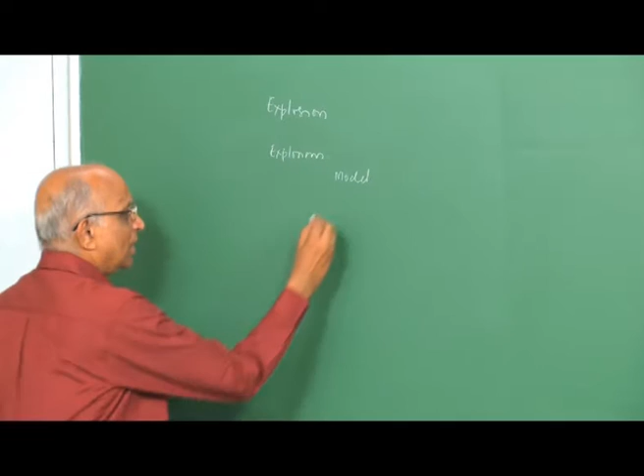We looked at the modeling of the explosion and also determined the consequences, the damage, the type of blast wave, the type of overpressure, the type of impulse you get from an explosion. And by now we are very clear about explosions in general, and also we talked of inerting, vents and all that to bring down the destructive nature of explosions.

Having said that, we also in the last lecture looked at quantification of damages from explosion. We looked at the dose response curves, we looked at the probit, and now we are in a position to say, well, an explosion is something undesirable, and an explosive is also something undesirable.

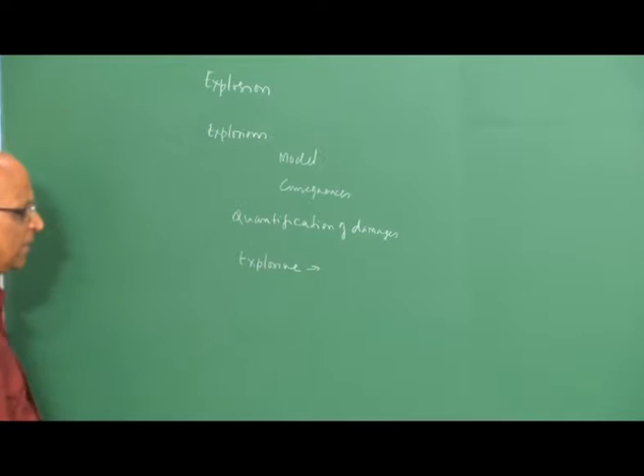It could be a gas, it could be a liquid, it could be a mixture, it could be anything. It must be handled with care. That means the storage of the explosive, maybe the transport of the explosive, also maybe the generation of the explosive plus storage plus transport plus the actual use, that is in application, must be done with some safety precautions in mind.

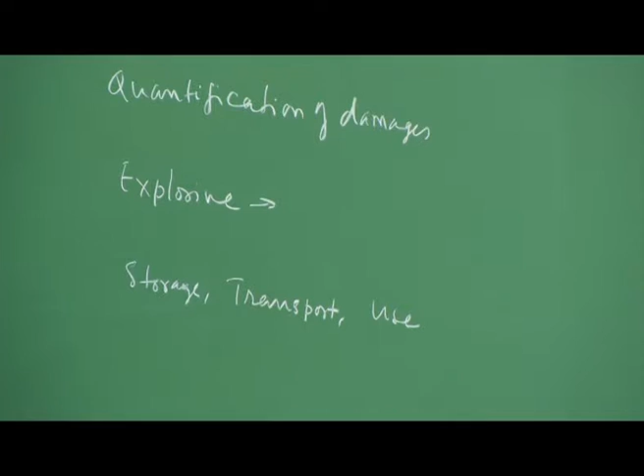But whatever be the type of safety criterion we use, accidents do happen. Like for instance, I am very careful to cross the road, I am very fearful of the traffic, I take all precautions, still somebody can come and hit me and I could still get hurt. Therefore, accidents are something which are unplanned activity.

Being unplanned, I think it is necessary to see under what conditions accidents can take place and also ensure that these accidents in the use of explosives do not generally occur. Therefore, let us get into some little more details of accidents.

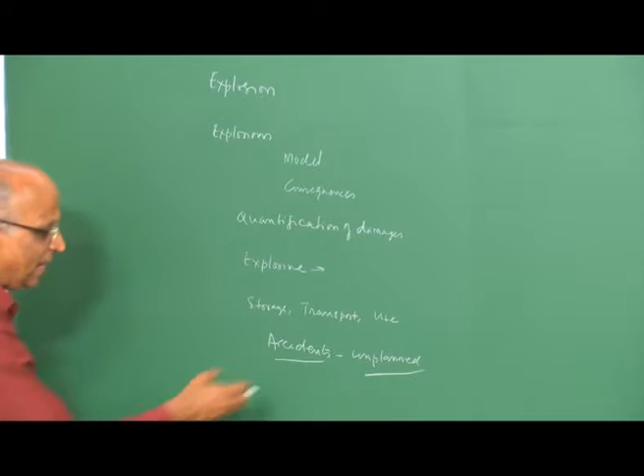When we say an unplanned activity is an accident, there is always a risk involved in whatever we do, and there is a greater risk in the use of explosives. Therefore, if there is a risk, can you evaluate or identify it? Like for instance, identify the probability with which an explosion can take place in a given set of conditions.

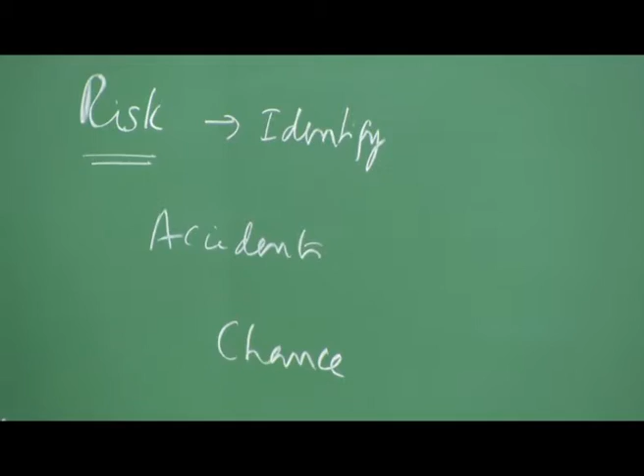And if we are very clear about it, then maybe we can take some steps to counteract the occurrence of these explosions. Having said risk, and having said something about accidents, there is always a chance that an accident will occur. When I say chance, what is it I mean? Well, there is a possibility, and when we say chance in Arabic, the word chance is known as azhar, and therefore we say a substance is hazardous.

From the word hazar, you say hazardous, and when we say hazardous substances, we say, well, explosives are hazardous substances and have to be handled with care. When we say hazard, we mean the potential for an accident to take place.

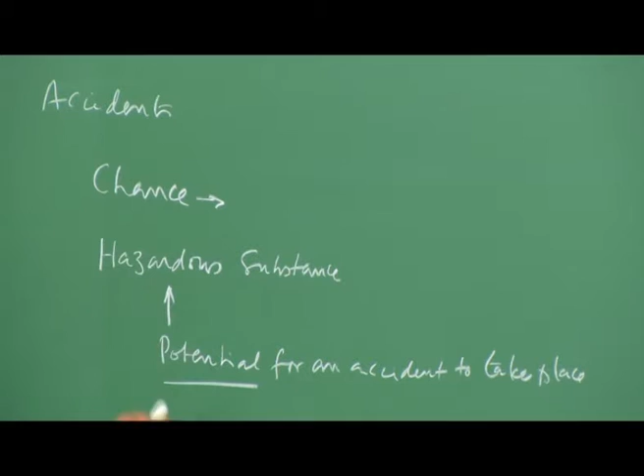That means we need to reduce the potential, and that is why substances like liquid fuels, when they are being transported, are labeled hazardous substance, please be careful, because in case there is a spill, maybe you could form an explosive substance. Therefore, we talk in terms of hazardous substances, and the potential for an accident to take place is always there, and that is the meaning of the word hazard.

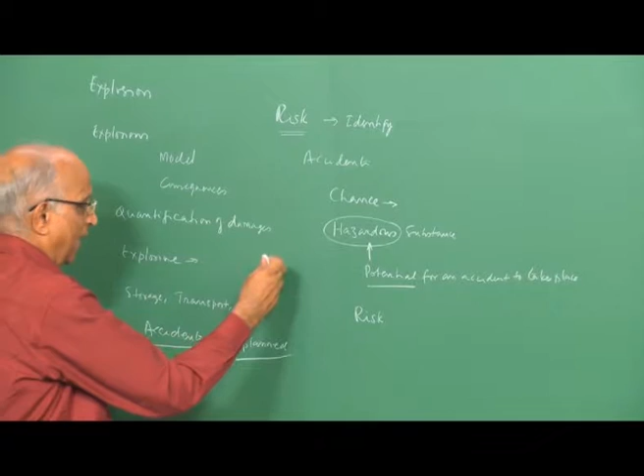And when we talk in terms of risk, well, the risk should be so small that the chances of an accident taking place must be so small that maybe we should be able to ensure that an accident involving these explosives does not take place, and that is why we do the risk analysis.

Having said this, let us also take a look at what it is we are looking for. We say we cannot zero out the chance of having an accident, make it 0. Therefore, all what we can say is make it as low as practically possible, or as low as reasonably possible, or we call it ALARP.

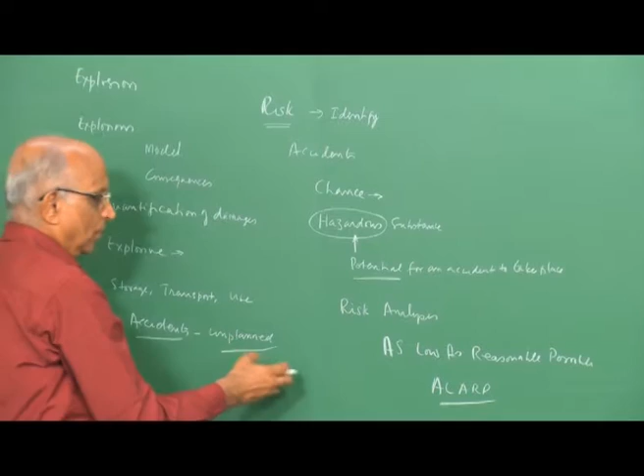This is the word we use, namely we would like the risk to be as low as reasonably possible, and let us work towards this. In this class today, we will work on the subject of risk analysis of hazardous substances, namely explosives.

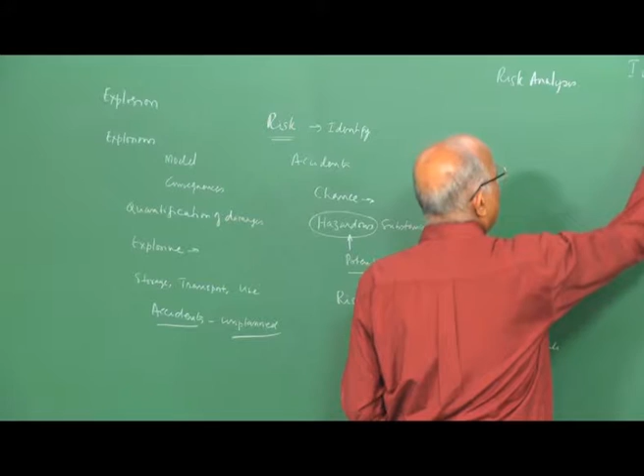There are different types of doing a risk analysis. For instance, you have methods like risk analysis, where you have to be able to identify the potential for causing an accident, let us say identify the hazard.

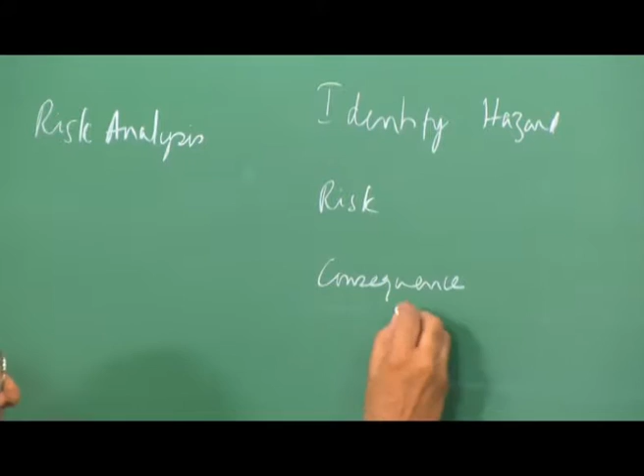We also need to be able to carry out the precise quantification of risk in the risk analysis. We should also be able to determine the consequences if an accident occurs, so the analysis of the consequence has to be done. And we must not forget, if an accident can occur more frequently, it leads to more chances of an accident taking place, so a frequency analysis has to be done.

There are different ways of quantifying all this, and the types of risk analysis which are done include what we call what-if analysis. This is something simple: what if a spill occurs? Will it explode? Under what conditions will it explode? I could use this, but it is not very quantitative.

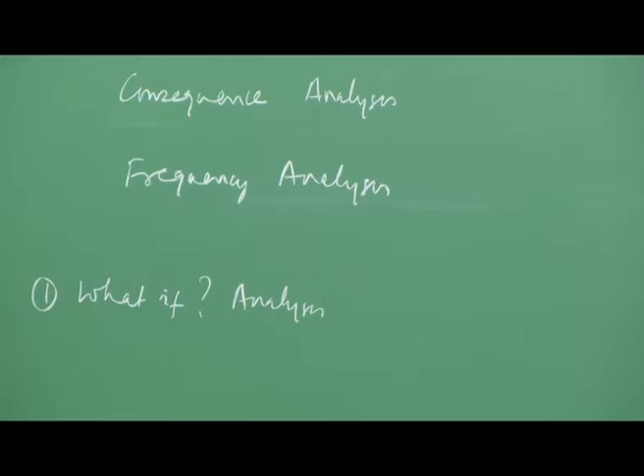I could also talk in terms of a safety audit or safety check, in which case I make sure that all the safety procedures are built in, but again the safety audit cannot really quantify the type of risk involved. I want to find out what is the probability of having a risk.

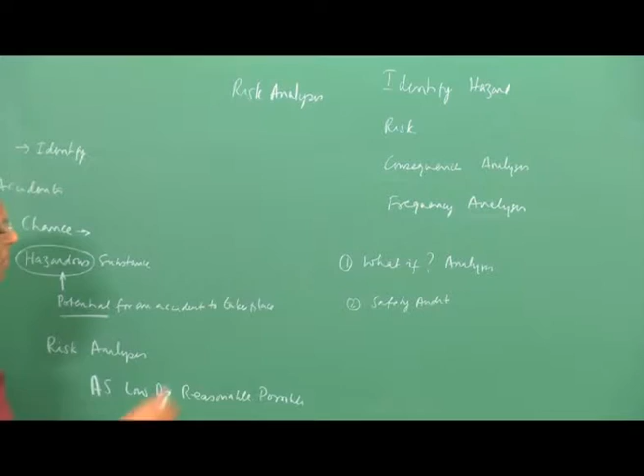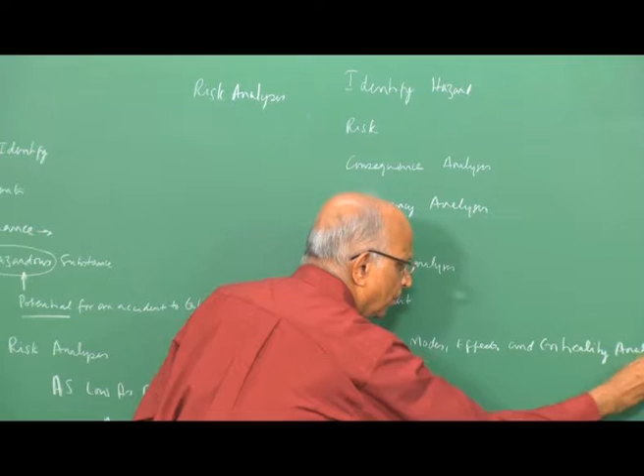Maybe the third could be what we call failure modes, effects, and criticality analysis. This is known as FMECA - failure modes, effects, and criticality analysis. But these three cannot directly give you the quantification of the risk involved.

They are necessary because they help you understand the reasons for the explosion, the safety features which need to be followed, and the different failure modes. Effects and criticality analysis cannot come out with things like standard deviations and the probability of an explosion.

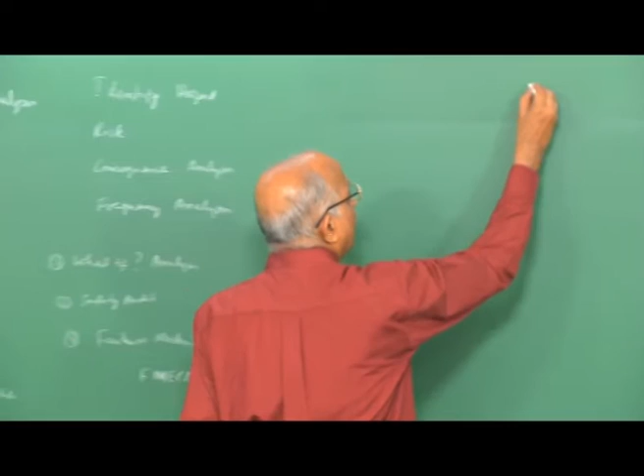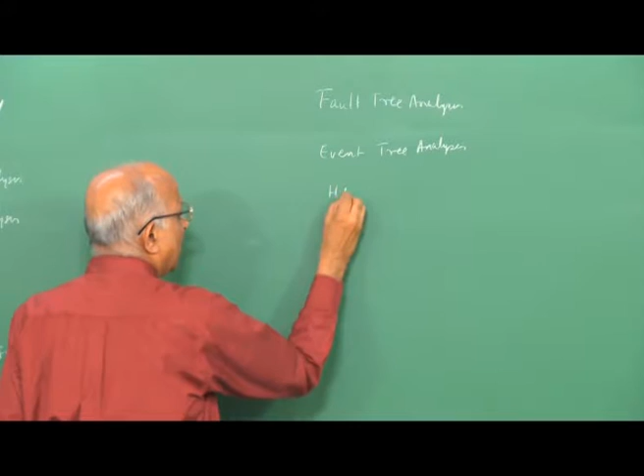But what I do is a little bit different. In the class today, I do three types of risk analysis only. Let us say fault tree analysis, the second one is event tree analysis, and the third is known as HAZOP - hazards and operability analysis.

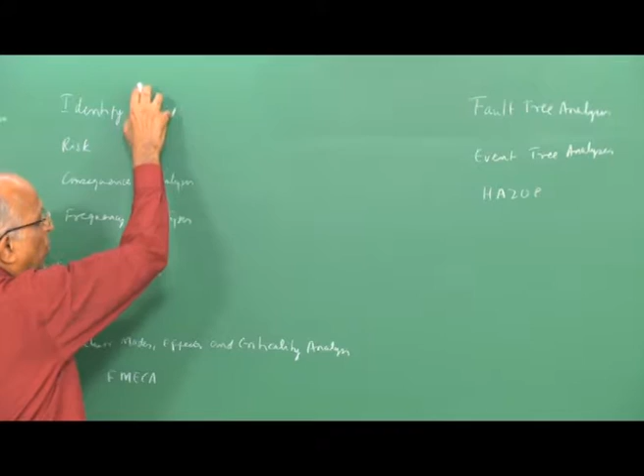These are the three, and in two of them we will be able to identify the risk involved and also identify, looking at the tree diagram, what types of hazards constitute most to having an explosion. In HAZOP, we will basically look at consequence analysis and frequency analysis, coming out with suggestions on operating a plant under conditions where the risk is as low as reasonably practicable.

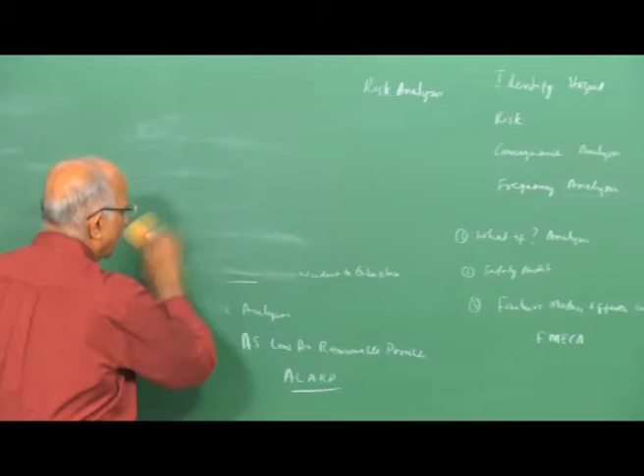Having introduced the subject, let us go to the fault tree type of analysis. In this, what is done is we look at something like a deductive logic, namely the final scenario - what you have is an explosion taking place. Let us say that the final event is an explosion.

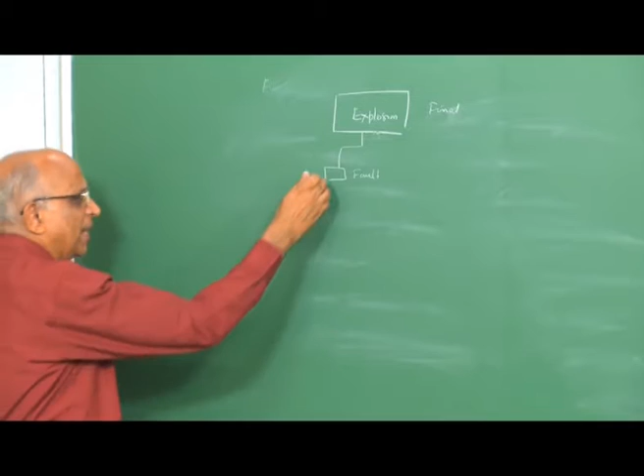We start from the final event - let us say this is the final event, which is an explosion. We try to identify the faults or the precursor events which ultimately lead to this explosion. For instance, maybe this explosion could have arisen out of some fault here - some mismanagement, some mishandling, maybe an ignition source coming in contact with the fuel which it should not have.

Maybe this fault could have come from some other fault, let us say F1 and F2. Maybe these faults could have come from something like F3 and F4, or some more basic events, and so on. This could have come from F5 and F6. Therefore, we start from the final event and keep working out what are the basic faults which could result in this particular explosion. Point 1.

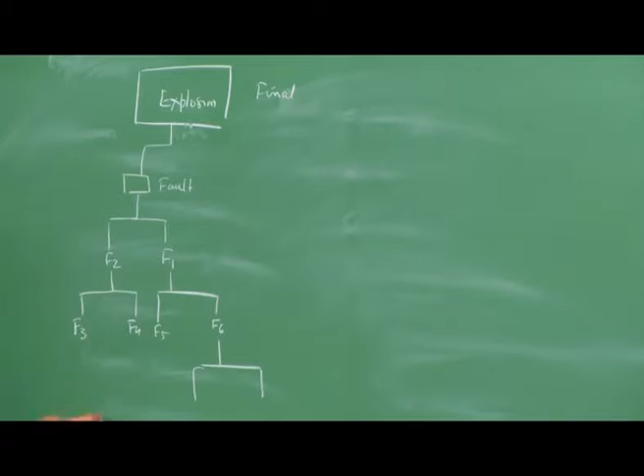Point 2, when we look at the basic events, we can say a basic event occurs in nature so many times from generalities. I can put a probability to the basic event and work out the probability of each of the intermediate faults or intermediate events taking place, and arrive at the final probability of an explosion. Therefore, you have something like branching out, like a tree branching out, and this diagram is known as a fault tree.

Having said that, the events which are ultimately the last set of events that cannot be broken down any further are known as basic events, and the intermediate faults are known as intermediate events.

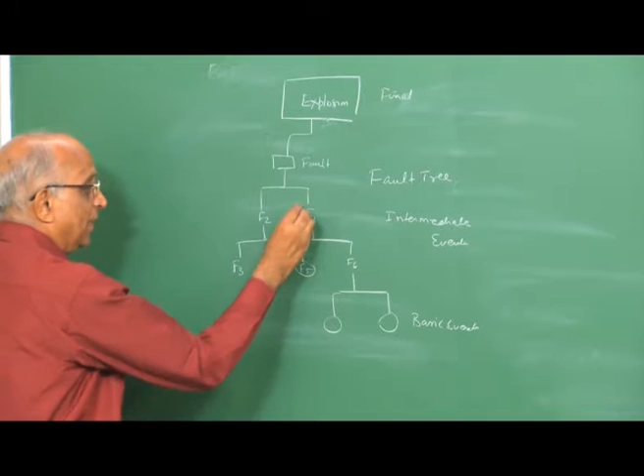And now the basic events lead to an intermediate event. This intermediate event, and this may be a basic event, could lead to an intermediate event. This intermediate event and some other intermediate event leads to some other intermediate event, and this finally leads to an explosion, let us say. Maybe I could have another chain coming over here, another fault over here, another fault over here, and therefore you have a tree. And therefore, you work out using deductive logic, going from the final event to the basic events.

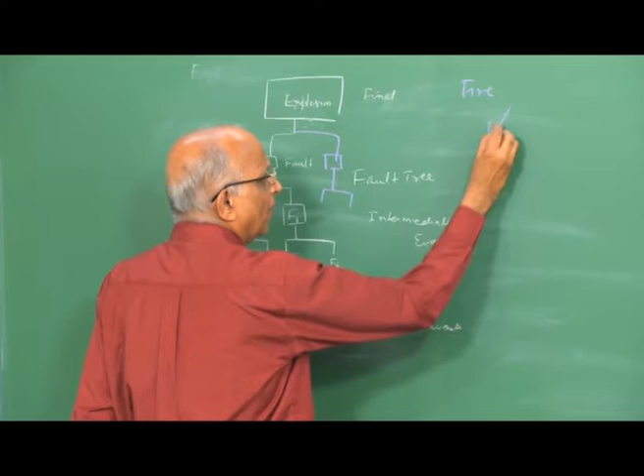Let's illustrate it through an example. Namely, let's say I have a fire. And what happens in a fire? Well, I need a fuel, I need air, maybe both have to mix. I also need an ignition source. And therefore, if I say I want to create my fire, my fire is my final goal, or this final event is a fire.

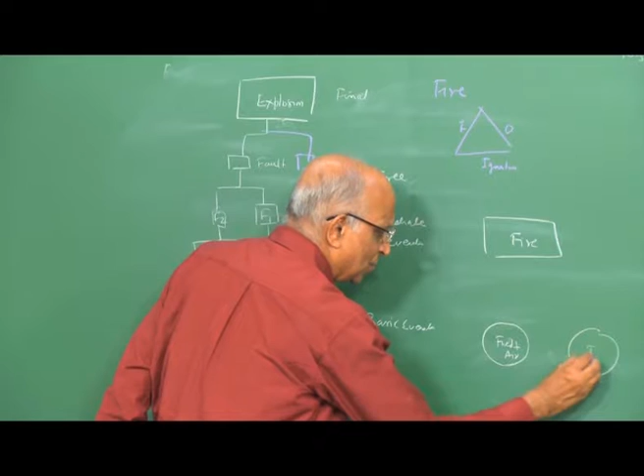And let's say my basic events, what I have are a fuel and air which are mixed, which is available to me, which is basic. I also have something like an ignition source over here. Well, these two lead to my final event of a fire. But how do these two basic events relate to this? That means there has to be an opening for it to communicate with each other.

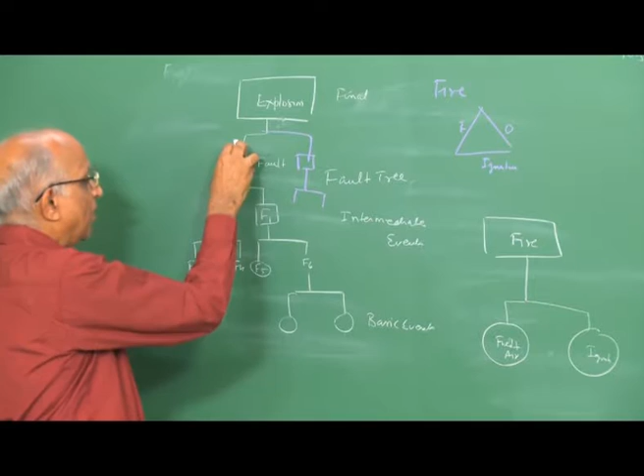Therefore, the basic events, and also the intermediate events communicating with the next intermediate event, and these intermediate events communicating with the final event, is through gates. Like for instance, we enter a house through a gate, so also a gate is an opening, and the basic events are communicated to the next set of events through gates or openings. There are different types of gates possible, and that is what makes this particular method essentially very challenging and fruitful. There are three types of gates possible.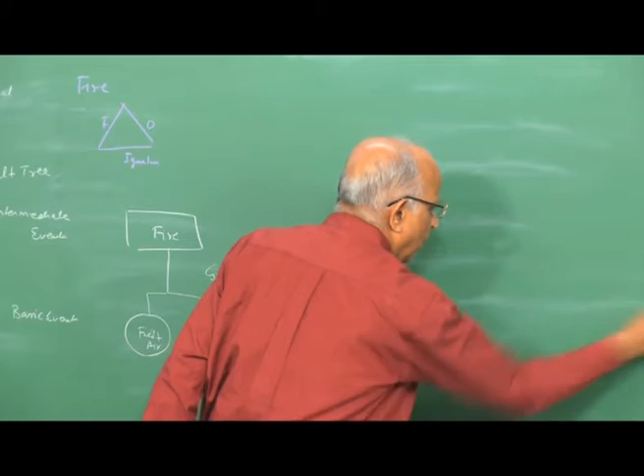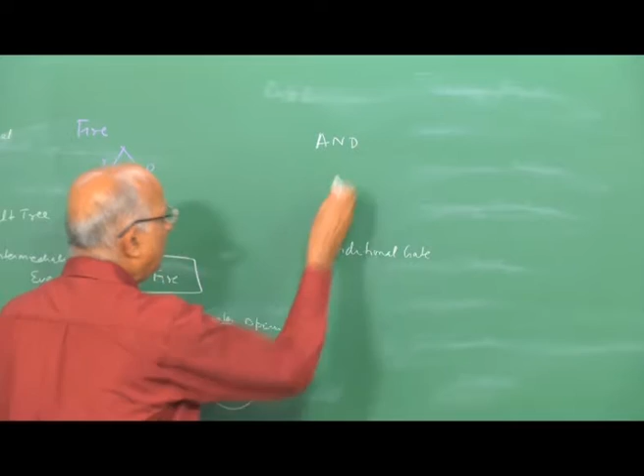One is we can talk in terms of an AND gate, we can also talk in terms of an OR gate, we can also talk in terms of a gate which has some conditions imposed on it, like for instance a conditional gate. What do we mean by these three gates or openings by which the basic events get into the final event?

Let's say I have fire. To have a fire, I go back to this particular example. Maybe I have a basic event in which my gas mixture is available, I have the basic event in which the ignition energy is available, and I am talking in terms of an event in which I have a fire taking place.

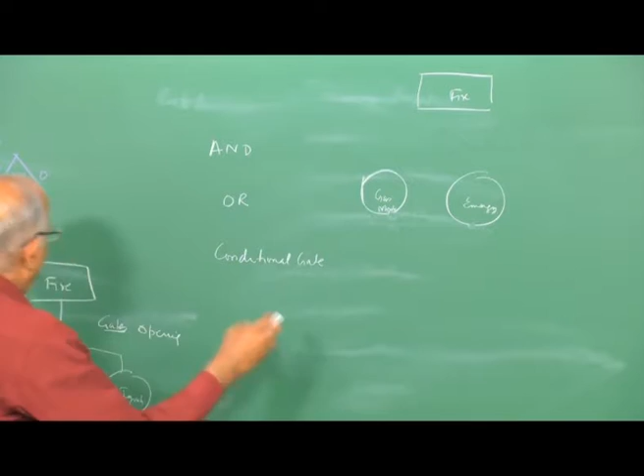To be able to form a fire, we talk in terms of a fire triangle or an explosion triangle, we need all three together. We need the gas, we need this, then only I can result in a fire. Therefore, we say both of these things are required at the opening to be able to form a fire, and this AND gate is represented by something like an ellipse with a curve like this. This is what specifies an AND gate.

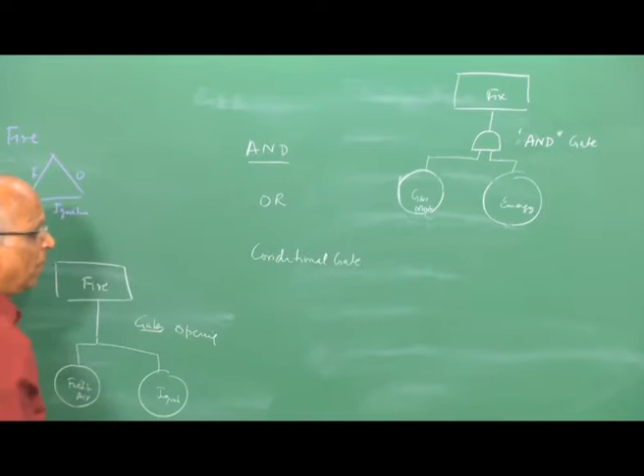Therefore, we have something like an AND gate. We also have something like an OR gate. OR gate means, supposing I want to form a cloud of explosive, and the different ways in which this cloud could have been formed are, maybe there is a tank, an LNG tank. In the LNG tank, I have the vent valve which gets opened, and the LNG rushes out, mixes with air, and forms a cloud.

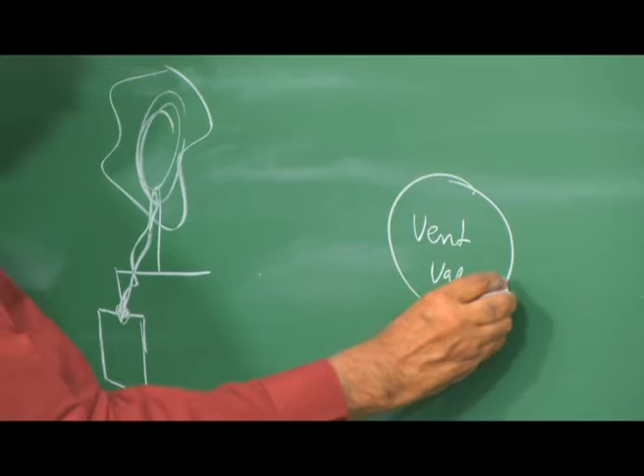Therefore, one of the basic events I can talk about is maybe the vent valve has by mistake opened. I could also think of a situation wherein somebody tampers with some of the check valves over here and allows the gas to pass through. So that means somebody tampers with your tank and allows the gas to come, and my final event is formation of a cloud, a combustible cloud.

Now, if the vent valve by itself opens, well, I could release the gas and I could have a cloud being formed mixing with air. If somebody comes and tampers with it, it also releases. So how is this going to get communicated with the vent valve, and how is it going to get communicated with the tampering, which is a basic event? It could be either one of them that results in the formation of a cloud, and this either-or is what is the OR gate, and this OR gate is shown in the form of a fish shape. This is an OR gate, meaning either one of them can do the job.

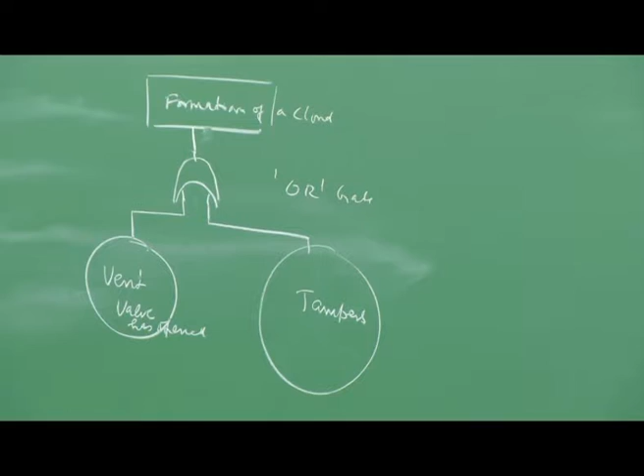The third type of gate, which we call the conditional gate, is one in which maybe I have an event over here and the final event over here. Before this, unless the pressure exceeds some limit, I cannot have the final event taking place, and therefore some condition is associated for it to go through. This particular gate is represented by a condition under which the intermediate event or the basic event can lead to the final event. That means the pressure must exceed some limit, temperature must exceed, or concentration must exceed this condition, and this is known as the conditional gate.

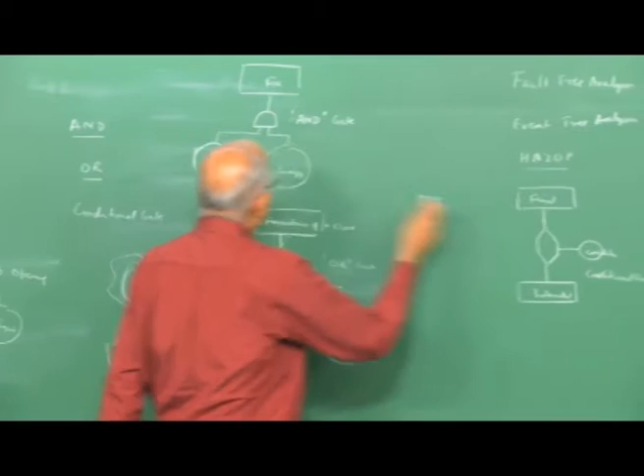We use all these three gates to draw back the fault tree diagram which I just mentioned. But in practice, the conditional gates are not much used, so we will talk in terms of the AND gate and OR gate, recognizing that the conditional gate would be similar in application. Before returning to the fault tree diagram, let's see the distinction between an AND gate, where both events are required to form the event, and an OR gate, where one of the two events can lead to the formation of the event.

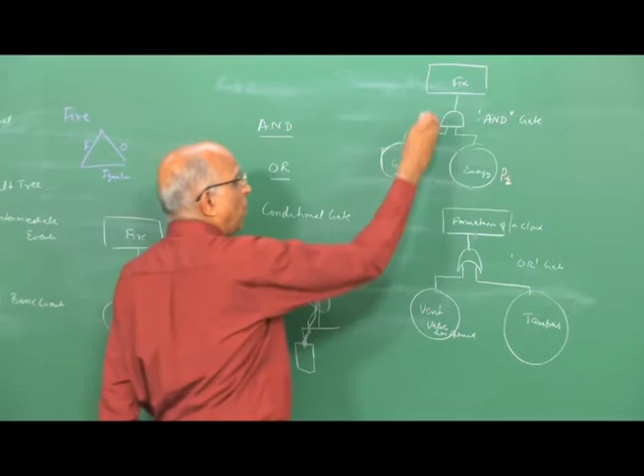Let's say the probability of an event, a gas mixture being formed, is P1. The probability of an ignition energy being available is P2. Now the final probability of forming a fire has to be less than both P1 and P2, because both are required, and therefore P equals P1 into P2 in this case.

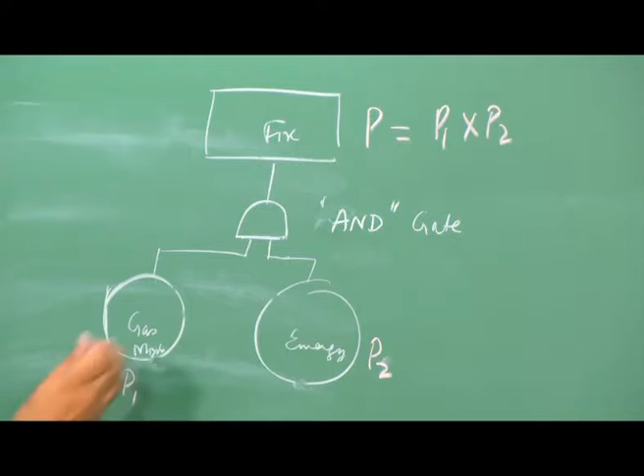In case the formation of the gas mixture is related to the energy requirement, which is not normally possible, but suppose one of the basic events is related to this event here, then the probability will be greater than P1 into P2.

In case of an OR gate, what happens? Let's say the probability of the vent valve opening is P1, and somebody tampering with it is P2. This can independently give rise to the event, and that can independently give rise to it too. Therefore the probability of forming this event equals P1 plus P2. But in case this is related to that—maybe while tampering, the vent valve automatically opens—then the probability of getting the final event based on these two events is less than P1 plus P2.

Normally the events are chosen so that they are independent of each other, and the probability is given by P1 into P2 in case of an AND gate, and P1 plus P2 in case of an OR gate. Well, this is about it.

Let us now go back and try to form a fault tree and calculate the probability of an explosion. Let's do it through an example—forming an explosion from, say, a spill at home.

Let us assume I have a kitchen. Being a winter month, the doors and windows are all closed. In the kitchen I have a gas cylinder, which essentially contains butane, C4H10. You have a pressure regulator, a rubber hose connecting to my stove, and the stove essentially consists of burner heads and control valves. This is the way I light a stove.

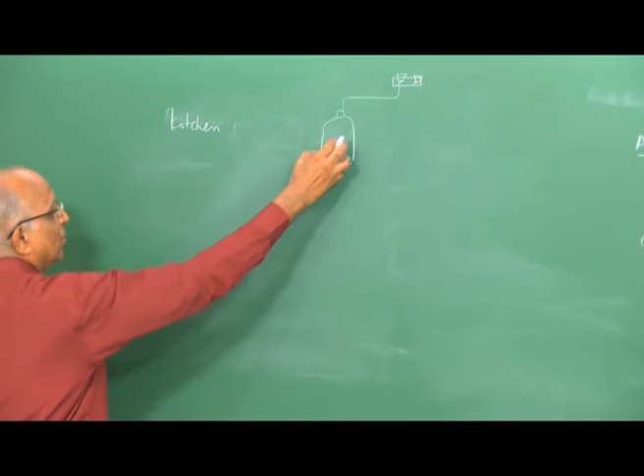Let's put down some causes. It is quite possible that the person using the kitchen forgot to close the valve of the stove. As a result, gas comes into the kitchen, which is locked, windows and doors all closed. In that particular volume of the kitchen, I form a gas mixture—maybe the butane-air gas mixture. This is scenario one.

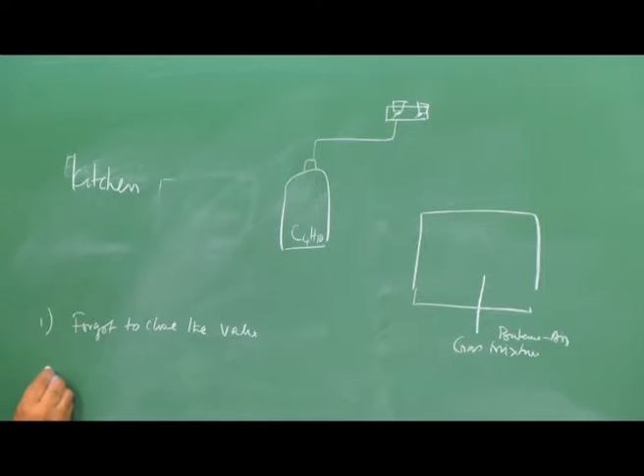Scenario two: you have these cylinders which are recycled all the time. It's quite possible that the regulator of the gas cylinder is so old—maybe the supplier gives me a defective regulator—and the regulator leaks, and I could also form a cloud in the kitchen coming from the regulator leak. These are the two sources of leakage, and these two sources form a cloud of butane-air mixture in my kitchen, and as usual, people do not observe it.

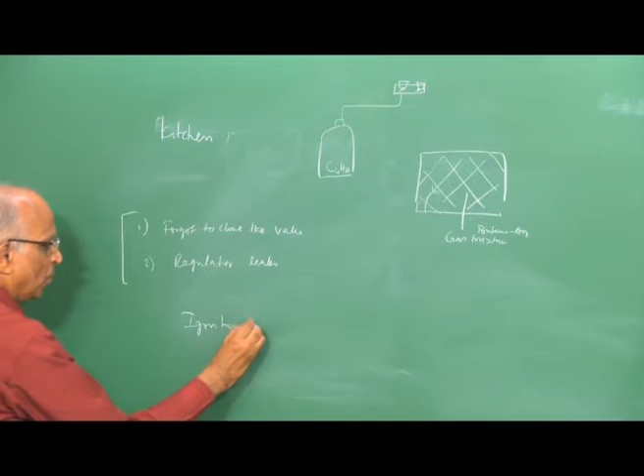The man in the house is used to smoking; he smokes a cigarette while coming into the kitchen. Therefore the ignition source could be his burning cigarette. Or the children in the house come in, find the kitchen smelling of something, and try to put on a switch—the spark from the electrical switch can cause the gas mixture to ignite, and it explodes.

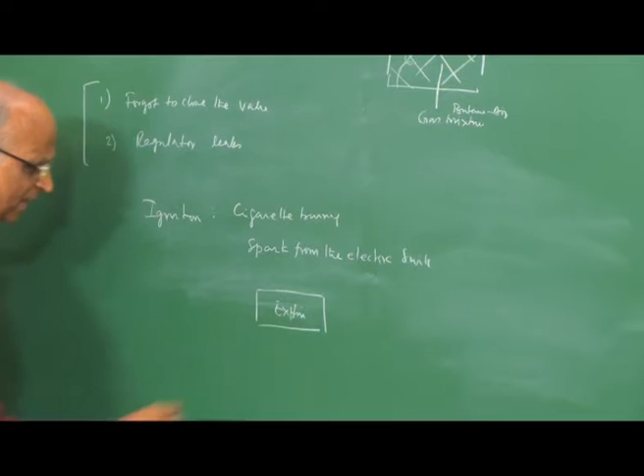So in this example, you have an explosion taking place, and the explosion could come either from a gas cloud formed from a valve left open unintentionally, or from a regulator leak causing this. These two are basic events, and the formation of the cloud is an intermediate event.

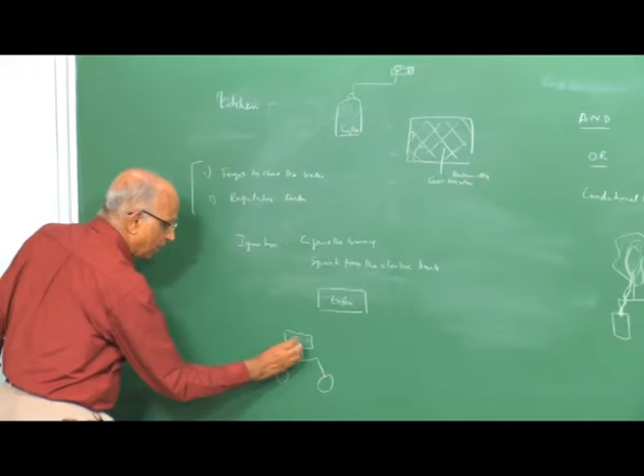Similarly, I could also have something like an ignition source which is an intermediate event, and this ignition energy could come from either of the basic events, like for instance a cigarette burning, the man smoking, or let us say a child comes and puts on a switch and releases some energy. Therefore, these four are the basic events.

These two, formation of a cloud and this ignition energy, are the intermediate events, and these two intermediate events feed into the explosion. How do they feed? They have to feed through the gates. I have a gate over here. What should these gates be? Let's now plot it in terms of the gates.

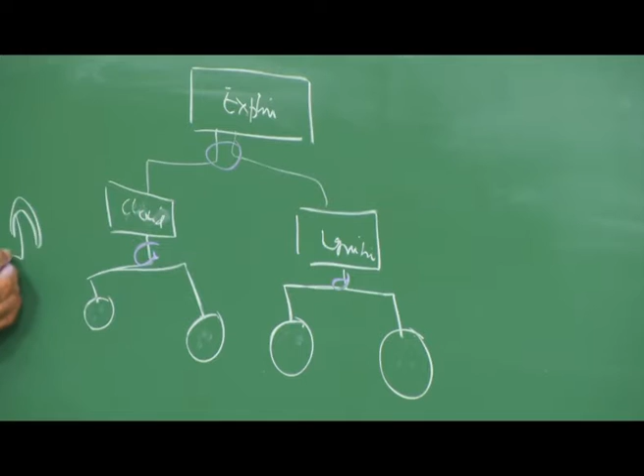We say this or this can lead to this, because either the valve opening or a regulator can lead to this cloud. Therefore, I will have something like a gate like this over here. I will have either the smoker who has the ignition energy because his cigarette is running hot, it can start a fire, or it can start the explosion, or the electrical spark can start an explosion. I have something like an OR gate over here.

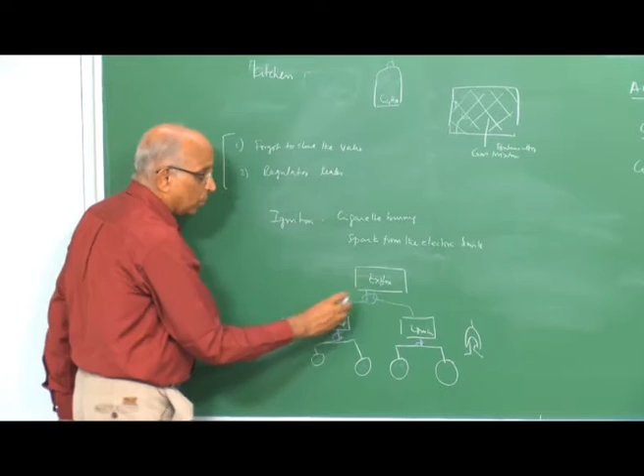This leads to the intermediate event, and I find, well, now I am left with this intermediate wherein a cloud of the gaseous mixture is formed. I also have ignition. Well, to form an explosion, I need both a fire triangle, fuel and oxidizer, which is formed over here, and I have the ignition source over here. This is also required. Therefore, I have an AND gate over here.

And therefore, if I have to draw the fault tree diagram for this, I will have the following. I have, let's say, the final event is the explosion in the kitchen. Well, I go through it through the AND gate, and the AND gate comes from two intermediate events. The intermediate events are having a combustible mixture or cloud, one having the energy for ignition.

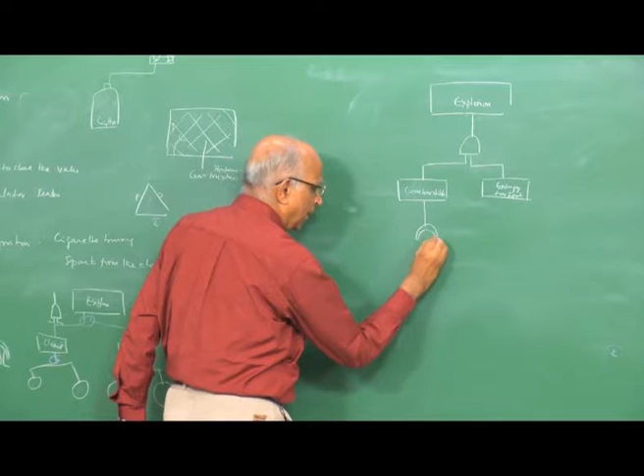How did the combustible cloud get formed? Through the OR gate, I have either the basic event of maybe a valve of the stove being left open, or maybe a pressure regulator being faulty. Similarly, I have another OR gate over here.

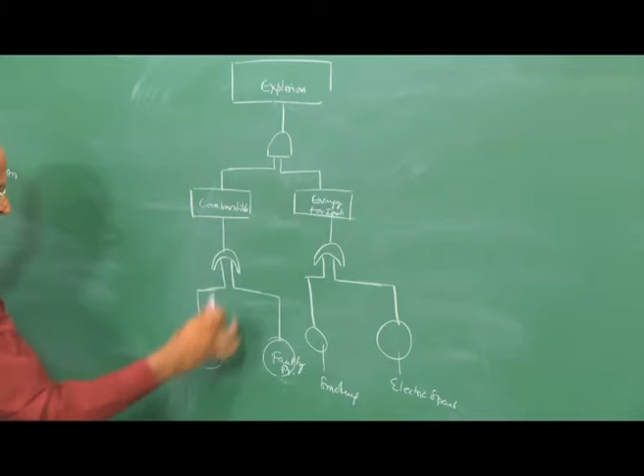And what are the two basic events coming over here? One is maybe somebody smoking, the man in the house smokes, and the other thing is maybe a child puts on the electrical switch and causes an electric spark. Therefore, this is the way we are able to get a tree diagram for the final event in terms of the intermediate events and in terms of basic events through an AND gate, through two OR gates.

Now, I want to calculate the probability of having an explosion. Let us say probability of the lady in the house forgetting to switch off is, let us say, P1. Probability of the cylinder being supplied with a faulty pressure regulator is P2. Then in this case, the probability of forming the combustible cloud is through the OR gate, P1 plus P2. And therefore I come up to this, let us go to this.

The probability of somebody smoking is, let us say, P3. The probability of having an electrical spark is P4. Therefore, the probability of having an energy release coming from both these things, which are through an OR gate, is P3 plus P4. Now I have these two intermediates. This has a probability P1 plus P2. Energy release has a probability P3 plus P4. This is through an AND gate.

Therefore, the probability of forming the final event, which is the explosion, is equal to P1 plus P2 into P3 plus P4. Now, all I have to do is calculate a net probability. If I know P1, P2, P3, P4, I can get my net value of the likelihood of a fire or an explosion. Therefore, let's put down some numbers.

We'll try to see. Normally when we do this, the probability for these things can be conjectured or taken from the large number of data which is available. The probability of somebody leaving the valve open, due to absent-mindedness or maybe tiredness, could be something like 0.01. This probability is quite low because the pressure regulator has some standards to which the manufacturer has to adhere. Maybe the gas suppliers have to give a better one, but still in some cases they do give a faulty one.

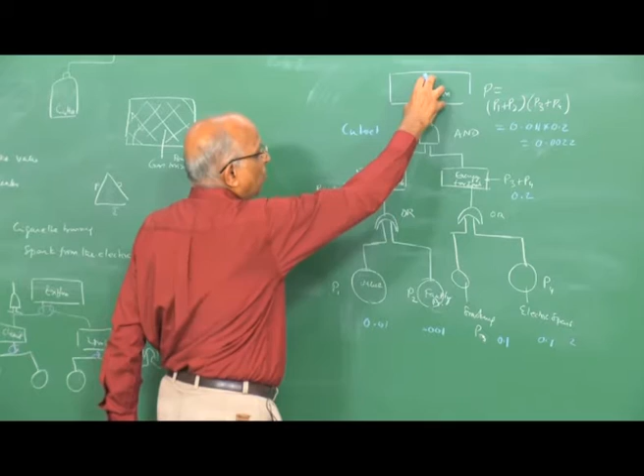The minimum set of these faults is what we call a cut set, and from such examples, we can also find out which are those pockets or gates or basic events which have the largest value of probability and which lead to a higher probability number, and we can focus on them to bring down the probability or risk of having an explosion. This is what we do in the fault tree analysis.

Well, in those cases it was essentially a weld failure. It is also possible that you could have a manual opening. At some places in the pipeline you have, say, the gate valve or valves are there, and somebody might have opened it out. Therefore, your probability that a weld failure occurs is P11. The probability that a manual opening takes place is P12. Well, either one of them can result in a flammable mixture, so I go through the OR gate. You see the shape of the OR gate over here. The probability of forming a flammable mixture is P11 plus P12.

Similarly, along the gaseous cloud, somebody can walk with a cigarette in his hand and ignite the cloud, and this has been the case in most forest fires all over the country in different places. Cigarette seems to be a cause of the majority of the fires. I could also have a car traveling next to the leakage line, and the friction spark from the car tire hitting a stone or the road creates a spark. The probability of having a cigarette burning is P21, and of the car spark P22. Therefore, the possibility of having an ignition stimulus is P21 plus P22, being an OR gate.

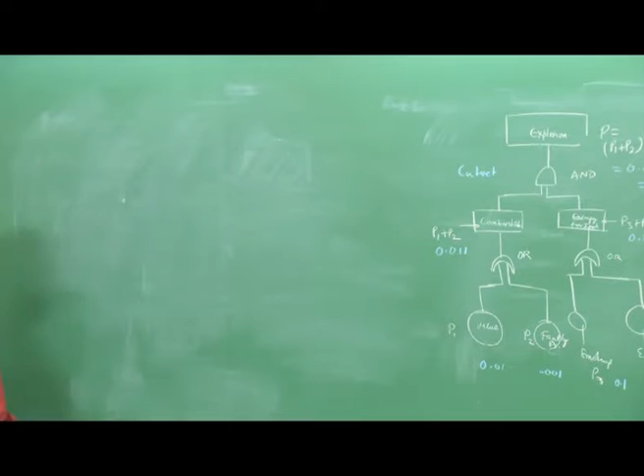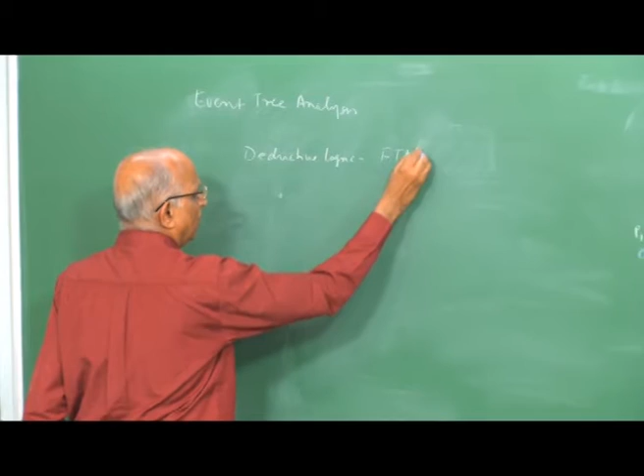This is also something like a tree, but rather than using the deductive logic which we used in the fault tree analysis, we use the inductive logic. What do we mean by inductive logic? We start from the basic event and proceed further till we get the final explosion.

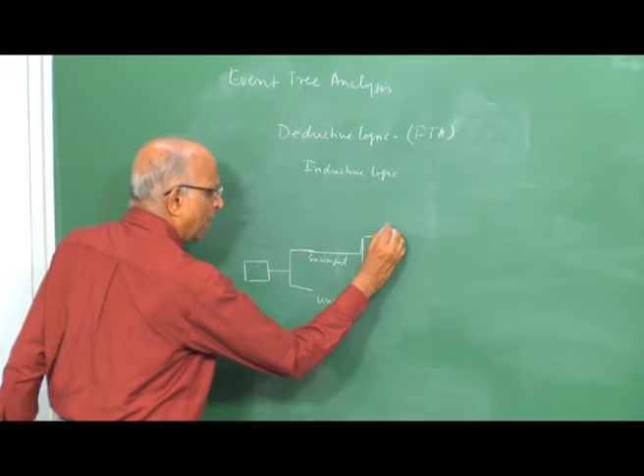How do I do this? Let us again take a look at it. Let us say my basic event is over here, and I start from the basic event. I go to the next event. Maybe the basic event outcome could either be a successful event or an unsuccessful event. What do I mean? Maybe I have a gas mixture, it either ignites or does not ignite - successful, non-successful. From this successful event, I could have again another success or non-success, and so on till I have my final explosion. I march from my basic event till the final event, which is an explosion, and this is what is done in an event tree analysis.

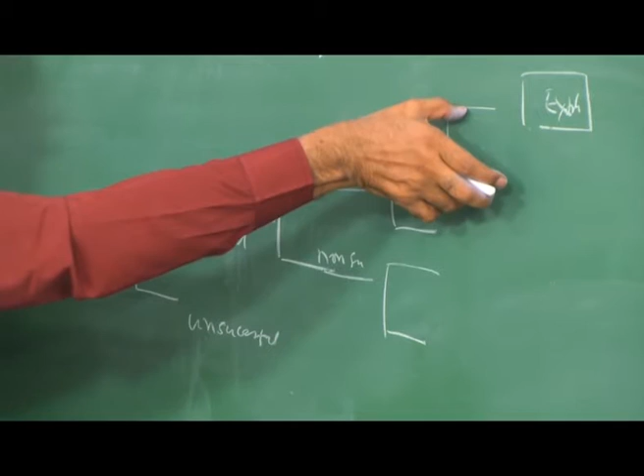For each of them, I could have a probability of this happening, this leads to this probability here, this probability leads to these two probabilities here, and I calculate my final value. Therefore, what is done in an event tree analysis is, let's try to put it down.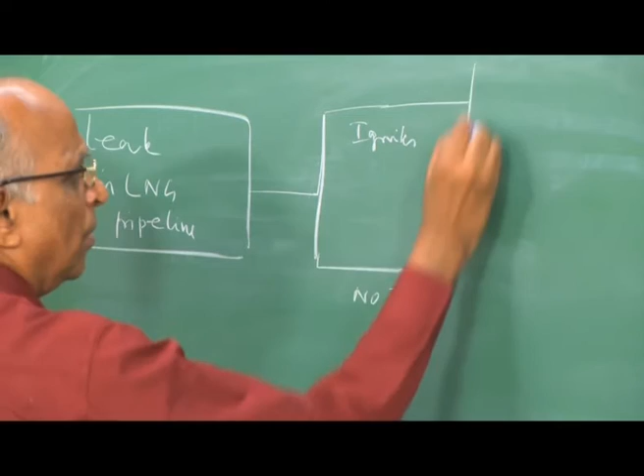I have, let me take an example, and nothing better than through examples we study. Let's take the example of an LNG pipeline catching fire and exploding. Let us say there is a leak in an LNG pipeline conveying LNG. This is the basic event. The LNG leaks, forms a cloud, and the cloud either ignites or it does not ignite - no ignition. This is point 1. The gas that ignites could either explode, that means forms a strong blast wave, that means it explodes, something like a detonation.

Well, it could just form a fire and burn out. Let us say that means it forms something like a fire or a flame. When there is no ignition, let us say it just disperses out. I will come back to this a little later with a better example of how even dispersed gases can again create a havoc. Let's just now put down this.

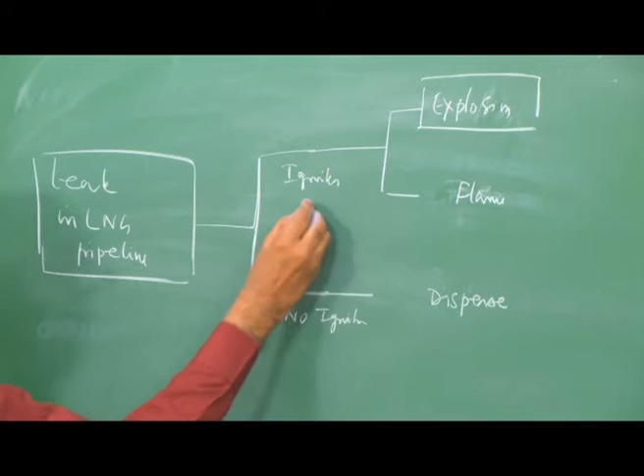Therefore, we say, well, the final event is an explosion. Just to illustrate, this is the explosion. In this case, it burns out, no harm is done. Therefore, I want to calculate the probability of this. The probability that LNG comes out of a pipeline and ignites - it's quite common. Maybe in summer months, I have a cloud, it definitely is going to find an ignition source. Let's say the probability is 0.8.

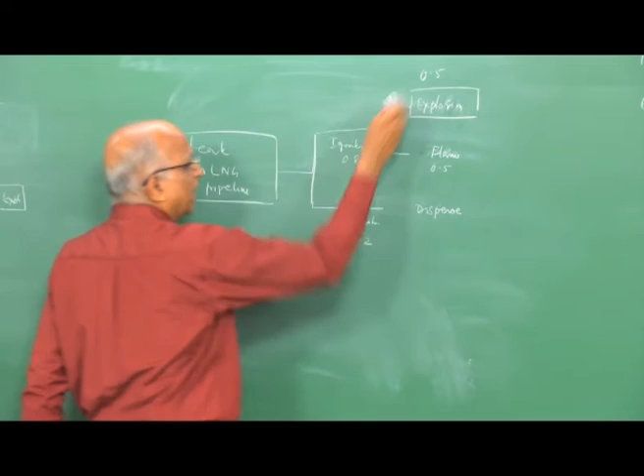The no-ignition probability is the balance, 0.2, the probability that it does not ignite - well, it just disperses off. When it ignites, the possibility of having an explosion, if there are a lot of blockages like trees, buildings and all that, the probability is 0.5. The probability of getting a flame is also 0.5. So the probability of forming an explosion is 0.8 into 0.5, that is 0.4, my probability of forming an explosion. In other words, we start from the basic event, go forward till we reach the explosion, and this is what we call an event tree analysis.

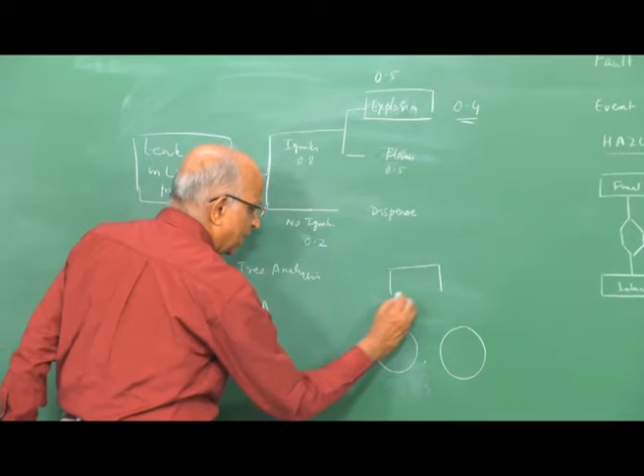While in the fault tree analysis, we denote the basic events by circles, the intermediate events by rectangles, and the final event by a rectangle, in case of the event tree, we show all by rectangles and just keep on multiplying the probability till we come to the final event.

Let me take one example, a more strategic example, more illustrative example of having some more links in the event tree, and this I show in the slide over here.

I am considering the case, since there is so much interest in hydrogen, supposing there is a hydrogen leak. The hydrogen leak comes out, there are two possibilities: either it finds an ignition source and gets ignited, the probability of this ignition is 0.55, or it does not find an ignition source and therefore gets accumulated. Let us assume in this particular example that a cylinder of hydrogen is being carried through a tunnel, and this tunnel is a long tunnel, and therefore, in the tunnel the hydrogen leaks.

Like what happened at Stockholm in the downtown area - there was a hydrogen leak, and maybe it does not ignite, the hydrogen accumulates within the tunnel or within the space, and this accumulated hydrogen after some time finds an ignition source, and when it finds an ignition source, it could either explode or form a fire. But the accumulated hydrogen is more dangerous because it has had a lot of time to mix and prepare itself well, and when it burns in a confinement, it is generally going to explode rather than form a fire. Therefore, the probability of forming an explosion is 0.95, while forming a fire is lower at 0.05, or maybe this accumulated hydrogen does not really meet an ignition source, and it just disperses.

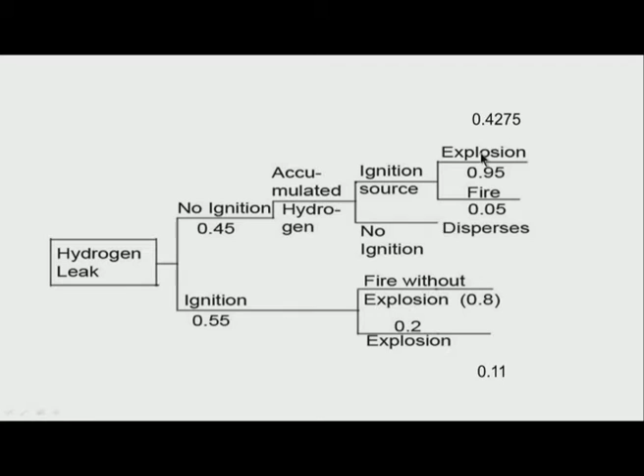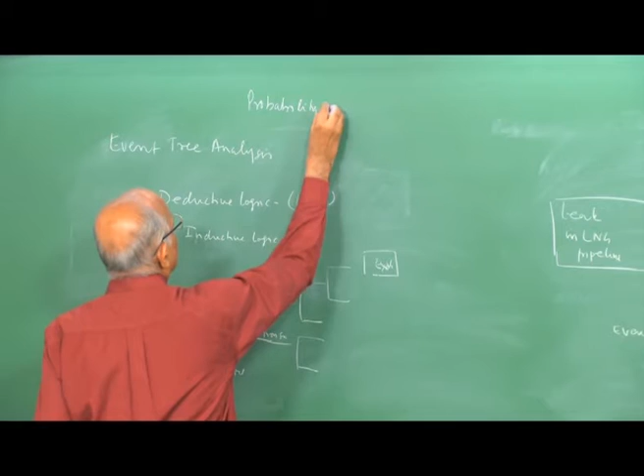Therefore, these are the two methods with which we evaluate the final probability of an explosion. But more importantly, we also find, while going through the paths, which are the paths which are more likely, and we try to plug in those things and ensure that the final event of an explosion does not take place.

With this, let us come to the last part, namely the HAZOP analysis. And what is HAZOP analysis? Let us just put it on the board. We have hazards and operability analysis.

Actually, this got started with chemical engineers in the Imperial Chemical Industries in UK, wherein they wanted to apply it for maybe making the plants more safe, namely the chemical plants. And therefore, what is done in this method is a little different.

Therefore, to stimulate thinking and discussions on possible hazards at each step of the process is what is done, and what they do is for each of the process parameters, they ask what are the process parameters normally. Well, we talk of flow, so much mass flow rate or so much volume flow rate. We talk of temperature, pressure, concentration, or we could talk of some other process parameters.

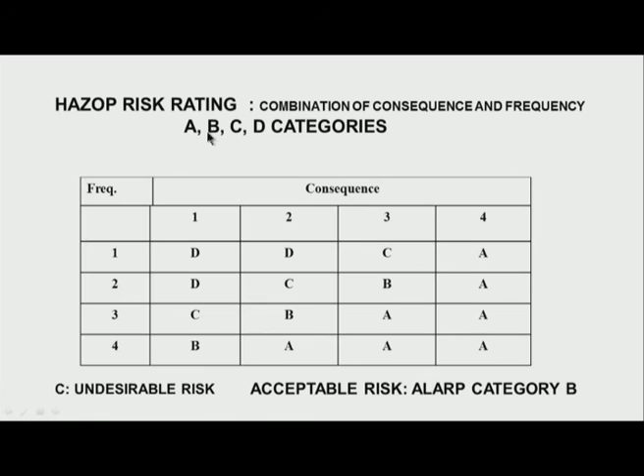This is the region in which I have acceptability, region B over region C. Region B is what we said earlier, acceptable is B. We have region B over here, and this is region C and D, which is not really acceptable. Therefore, the HAZOP plot gives the acceptable range of consequences and frequency. This is what is done in HAZOP analysis: you evaluate the consequences, you evaluate the frequencies, and put everything together in terms of A, B, C and D categories, evaluating the risk in these four categories.

But we must remember that HAZOP analysis is carried out maybe even before the plant gets commissioned, during the design phase itself. We sit on each of the processes in the plant and make sure no untoward thing is possible. Each and every element in the plant is considered, along with provision of alarms, automatic shutdown, automatic starting, provision of relief valves, etc. These are considered while doing the HAZOP analysis, and this is the third type of analysis, namely HAZOP analysis.

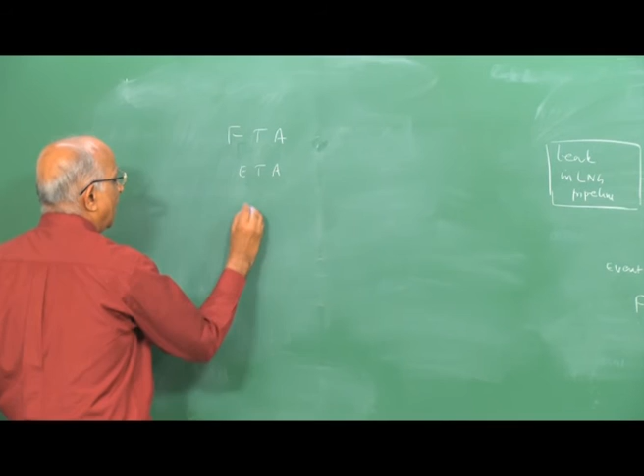To summarize, in this class we have done something on risk analysis, evaluating the risk through three methods: the fault tree analysis, second the event tree analysis, and thirdly the HAZOP analysis. These things give a good picture on what is the final probability of an explosion taking place, and what safety features need to be put in.

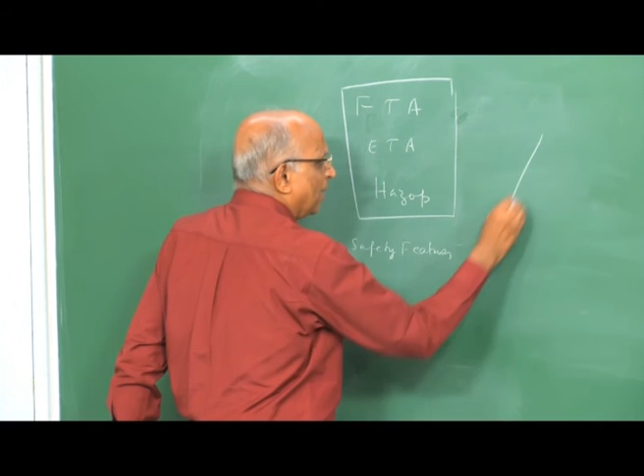But while talking on safety features, we have to keep in mind whenever we talk of explosions, the explosion triangle: fuel, oxidizer, and ignition source. We talked in terms of inerting, critical diameter, and maximum safe operating gap, such that an explosion does not occur and does not get transmitted to something else.

When we talk of ignition, it is possible to inert, to vent out the gases, to build in the safety features. But when we talk of ignition sources, especially electrostatic sparks...

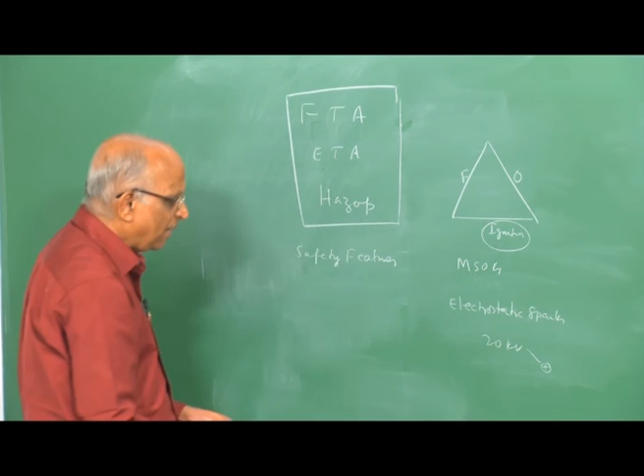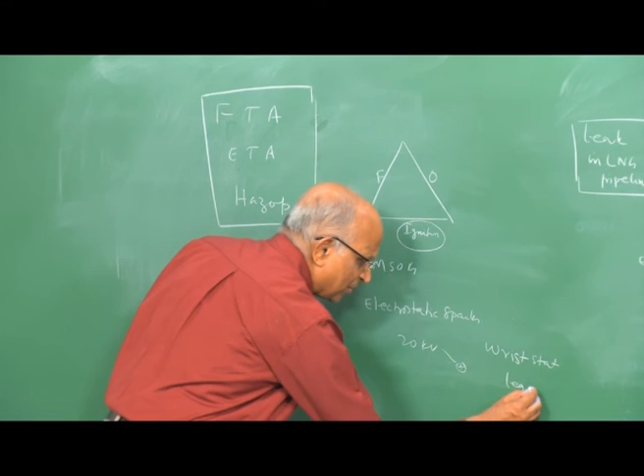It is possible that as I work in an environment and walk, the human body can get charged to a voltage of 20 kV, and when it is charged and I touch something, it can create an electrostatic spark. Therefore, from a safety point of view, maybe I can wear something on my wrist, a chain in contact with the ground which conducts away the charge, like a wrist strap or a leg strap. On my leg I have a chain which is in contact with the ground and it gets grounded, and no spark is formed.

We can also remember that if a room is more humid, electrostatic sparks are more unlikely. Therefore we must devise means by which I can isolate an ignition source from the combustible mixture, and even isolate the combustible mixture by suitable inerting, or when an explosion is taking place, by suitably venting out, decrease the degree of the consequences of the explosion.

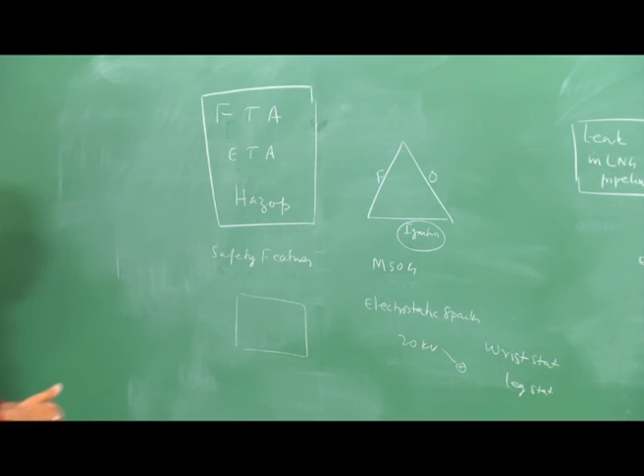This is all about the course on introduction to explosion and explosion safety. We covered the different aspects, including the safety aspects, the consequences, the reasons for causing an explosion, and how to go about preventing an explosion. Well, thank you.